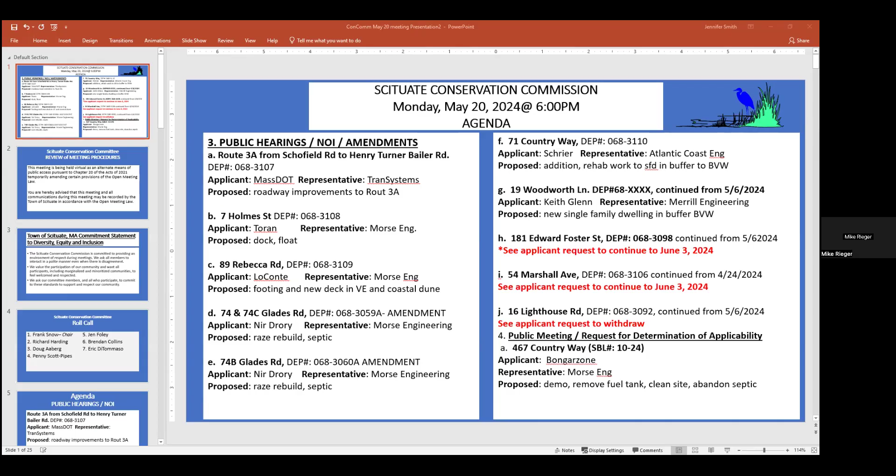Excuse me one second, Mike. Jen, do we have anything to put up on the screen for that one? Yes, sorry, I'm getting there. Hi, hello. I'm sorry, Mike, go ahead. There's a figure in the write-up. Yeah, this is good, Jen. Okay, so this is one sheet back, Jen, if you will, like sheet 11.

So this is the center of Route 3A where the Cohasset and Scituate town line is, right in the center of the screen. Everything to the south or east on this sheet will be in Scituate, going down toward Henry Turner Bailey Road.

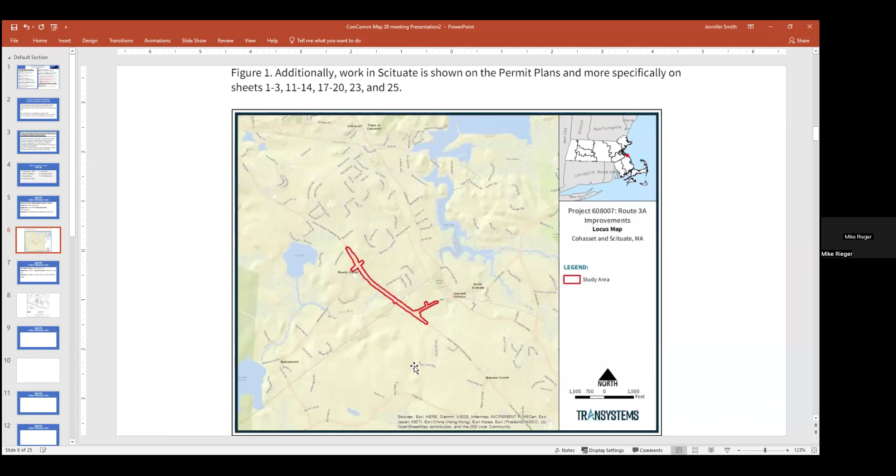I'm gonna switch back to this other screen just for a moment to show where all the work is on 3A. So the majority of the work is in Cohasset, but there is a small segment you can kind of see in the middle there. That dashed line is the town boundary. So about a third of it is in Scituate and two-thirds of the project is in Cohasset.

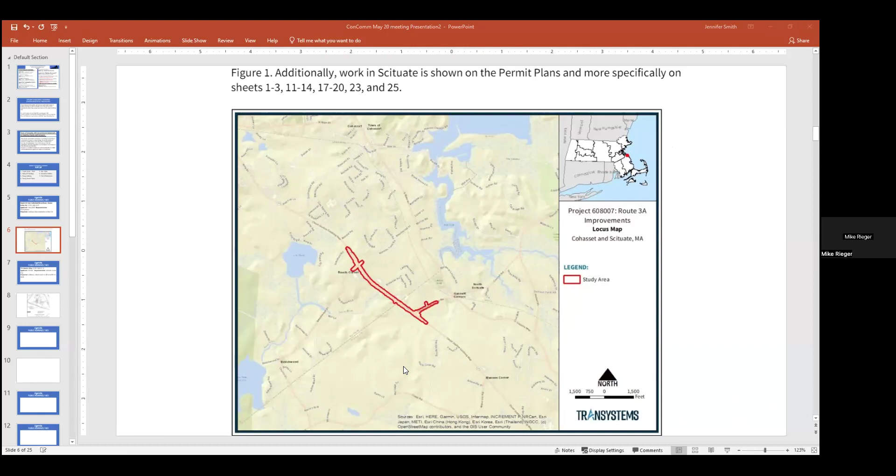Okay, back to the plan.

I wanted to touch on the anticipated construction timeline. It would be this fall 2024 to completion in summer of 2027, about 2.5 years of construction.

I also wanted to mention we had another site visit with Mass DEP last Thursday, 5/16/24, and we need to tweak some of the wetland flags. As shown here, you can see a wetland flag called H1 at the bottom of the screen. We went out with Mass DEP and refreshed the flags on Thursday, so there'll be subtle changes to the plans based on that.

And I guess next I'll talk about the wetland replication areas. Hold on, somebody's not muted? Greg, can you get him? Go ahead. Okay, yep, no problem.

So in Scituate there are two wetlands, wetland H and wetland I, we're calling them. If you go to the next sheet, sheet 12 - yes, right here. This is the impact to wetland H on the south side of the road.

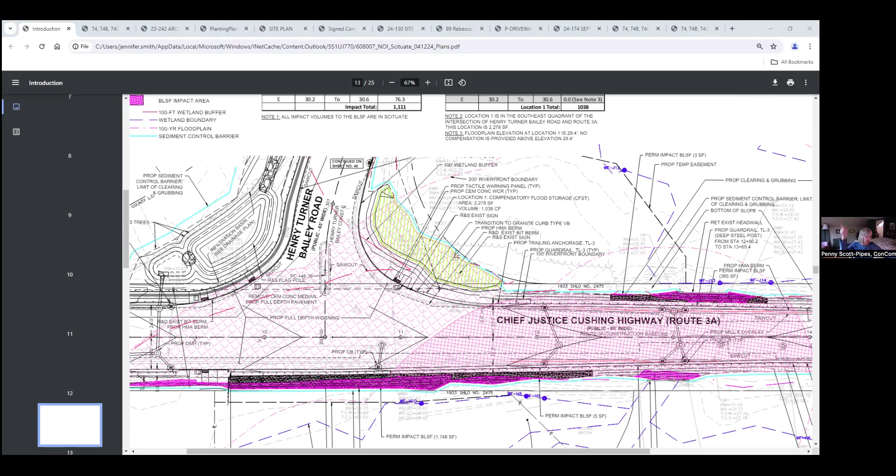We have so many accidents, but anyways. Penny, just to clarify, there'll be a signal at Henry Turner Bailey Road now as part of the project too, with a regular set of crosswalk lights instead of a flashing beacon. Booth Hill is the one that has the most accidents, but anyways, I'm done, Frank, thank you.

Okay, just don't forget our scope of review is conservation. Yes, I understand that. All right.

Richard? I don't really have any conservation questions about it. I would be interested to know, is the sidewalk going on both sides? It would make sense if it went on the southbound side—I'm saying that wrong, east, if you're headed south it would be on the eastbound side, yes, where it would turn into Henry Turner Bailey. I don't know the use of it on the other side, but that's beside the point, I'm just curious about it.

Yes, the sidewalk terminates right at station 9+50, it's on both sides of the road there, and then you'd have to cross Route 3A, go up Henry Turner Bailey Road, and cross where you can see those wheelchair ramps. So if there's going to be a signal, is there going to be a crosswalk? Yes, there'll be a crosswalk there. Okay, thank you, I'm done.

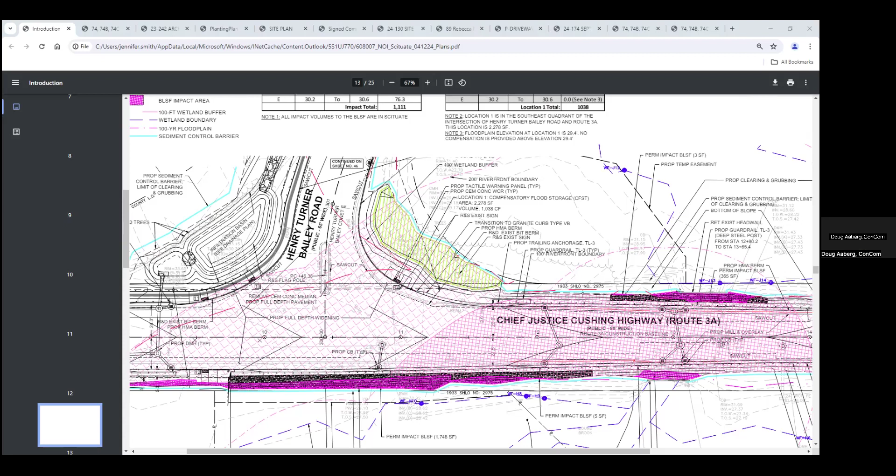Okay, sorry, that's not really a wetlands question, it's just a resident question. Sure, having easy access to the train stations is always a good idea. Okay, I'm good.

Thank you. Did Jen Foley join us? I do not see her. Okay, Brendan? Yeah, I don't think I have any additional questions.

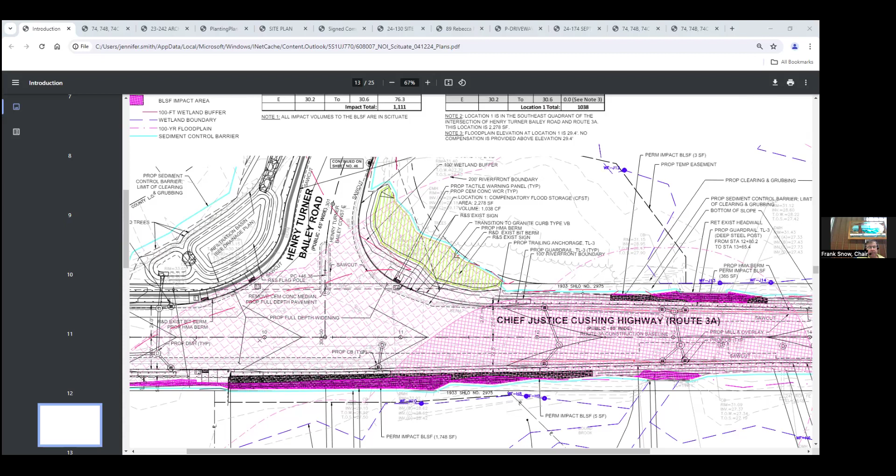My one question is on sheet 11, with regard to wetland H. You had mentioned constructing a wall. I see the scope of work line as well as the proposed sediment control barrier. The thing I'm having a hard time reading off the plan is where the existing guardrail is, and how much of an impact there will be extending Route 3A there, because there's obviously a steep grade change, and I'm wondering how that area of work was going to be staged, because we have the ledge cut there.

Obviously a very small piece of the marked wetland is going to be impacted there, but I was having a hard time discerning some of the lines. I see the gravity wall location, but building a wall, you're going to have to go probably a little bit farther, or am I misreading it? The extent the contractor can go is just to the temp easement line, which is that dark dashed line. And the erosion sediment control barrier is that cyan line you see.

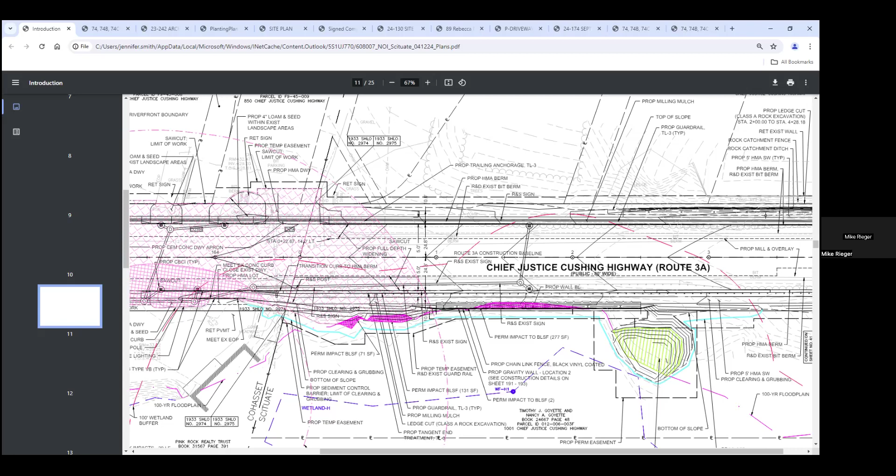If you go to the next sheet, Jen, sheet 12. These wetlands right here, wetland H and I, those are probably gonna look slightly different based on the wetland flags, like H11, that flag might slide up 5 feet or slide down 5 feet. It's more or less gonna be like the same wetland.

It just is gonna look slightly different. And then that permanent H impact area that says 52 square feet, that could potentially go down to 10 square feet, or maybe it goes up to 70 square feet. I don't have that information right now because we just got it on Thursday, but more or less this is the area that would change. Nothing else would change, I don't think. It would just be this vicinity and trying to replicate.

Do you know when you go before Cohasset? Thursday? Yeah, Thursday. And they have a lot more impacts. It's all actually north of Beechwood Street on Route 3A. Right. Yeah, there's a lot of wetlands in that area. Yeah, there's a lot.

It just, you seem concerned about the timeline and getting this out to bid.

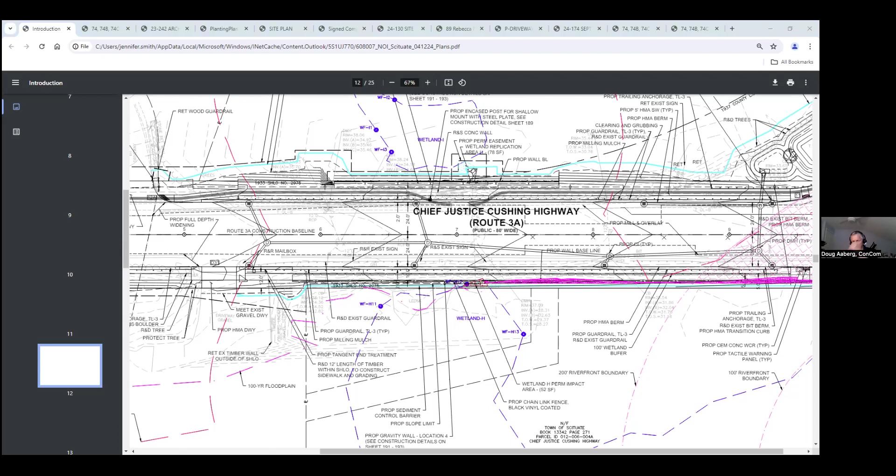I make a motion to continue to June 17th. That's from Penny. I'll second that. Who seconded? Brendan got it. All right, thank you, Brendan. All in favor: Richard, yes. Doug, yes. Eric, yes. And Frank, yes. Great, thank you.

Thank you. Thank you both. Have a good evening. Thank you.

Dock float, 7 Holmes Street. On May 20th, 2024, 6 p.m., the Scituate Conservation Commission will hold a wetlands hearing under Chapter 131, Section 40 of the Massachusetts General Laws and Section 30700 of the Town of Scituate Code of Bylaws, regarding the application of Richard and Ann Toran for work related to constructing a dock at location 7 Holmes Street, Scituate. Abutters and other interested parties are invited to attend. Information to access the virtual meeting is available on the website. And we have Greg Morse.

Good evening, Greg. For the record, Gregory Morse, registered engineer, Morse Engineering, representing the property owners, Richard and Ann Torian. The property is 7 Holmes Street, down in Humarock. As was just read into the record, the proposal here is a notice of intent associated with a dock at the property.

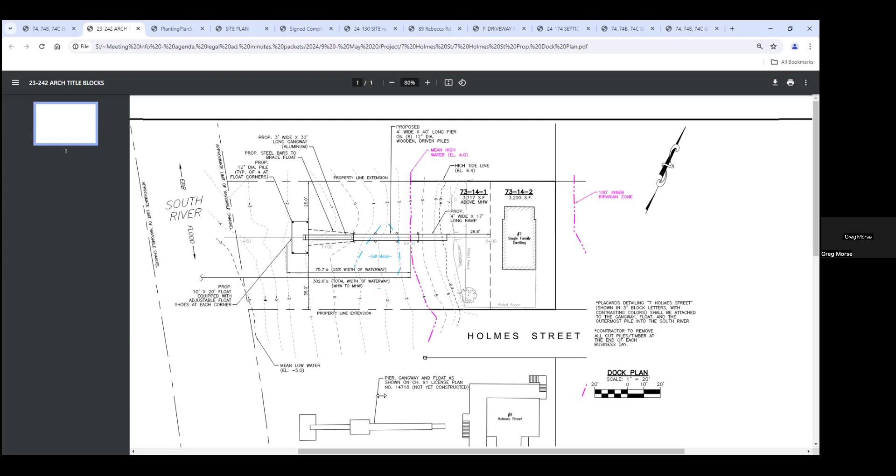You'll note on the plan, at the bottom, the property immediately to the south has a dock that was recently permitted there. The intent is that the contractor building that dock, which hasn't been built yet, would build both of these at the same time. Likely not this fall, but hopefully fall of 2025 would be the anticipated construction timeline for both projects at the same time.

This is our first stop. We still have to go to DEP Waterways and Army Corps of Engineers. But in reviewing this project, the items we've identified on the plan applicable under the wetlands regulations are the height of the dock over the mean high water.

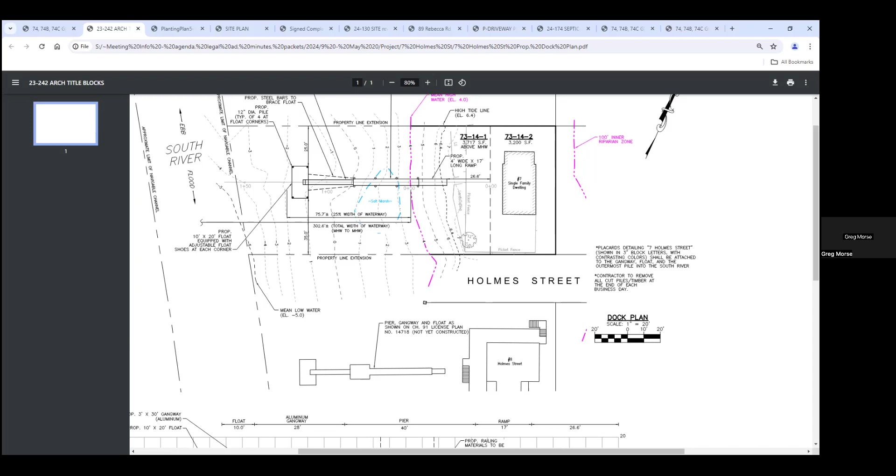If you scroll to the bottom of the plan, you'll see we've provided a profile of the dock, which identifies that the dock itself is 5 feet above the mean high water elevation. That's important because it allows access under the dock between mean low water and mean high water for pedestrian access along the river. The dock is largely over mud flats at this location, but there is a small portion that has salt marsh. Over that salt marsh portion, we've identified that the dock provides 6 feet of height from the bottom of the stringers over the salt marsh grass, to allow light to the salt marsh so it can continue to function.

DEP had no comments with this submittal. They did issue a DEP file number. I'm going to turn it over to you. Thank you, Greg.

Jen? Have we heard back from the harbor master on this? I don't think I saw his response, but maybe he sent something to you. We met with him preliminarily before we made this filing to show him the project and try to incorporate any comments he had. His comments when we met were to put the street number on the dock so it was identified on the float, and we made those adjustments. But since we've made the filing, I have not seen any formal comments from the harbor master.

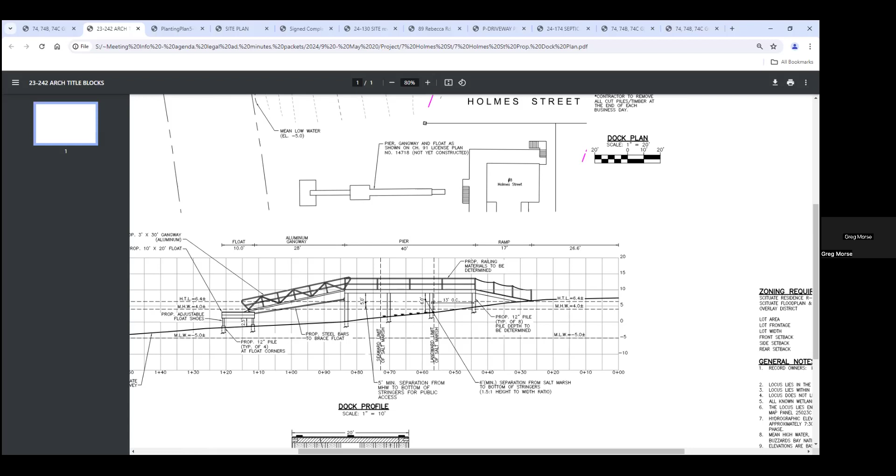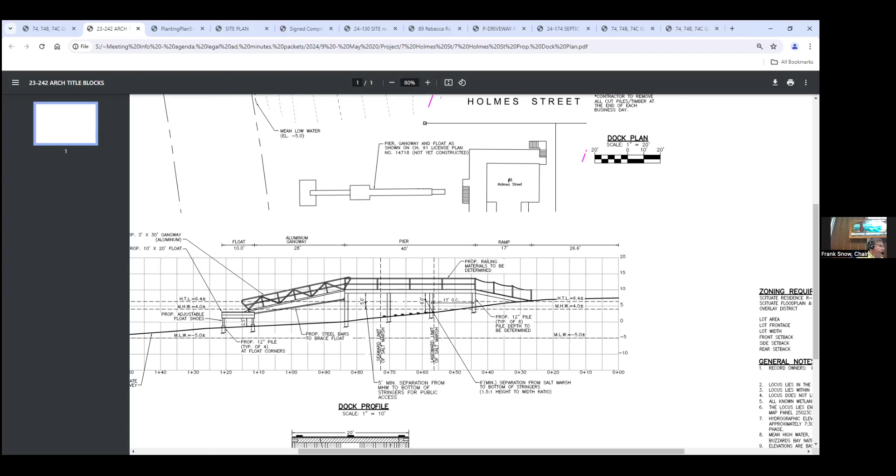Okay, he usually comments on where it is in the water also. We typically get a letter, don't we, or something, or an email? Yeah, so we can put that in the orders that we need to have something in writing from him.

Richard? Well, Greg, where the float is out, I'm trying to think how to phrase this question. It's frequently going to be in no water at low tide, I would believe. Am I correct about that? So yeah, this float is riding up and down on 4 pilings at the 4 corners, and they will have float stops on them so the float itself won't hit the bottom. I believe it provides a minimum of 2 feet from the bottom of the float to the bottom of the river. Okay, you caught why I was asking that question.

Second question, is that planned to stay in all year, or will it be removed at all in the winter? It could be conditioned to be removed. That would be fine, that works better.

And the last question for me would be on the ramp itself, how much space between the slats? I believe 3/4 of an inch is the requirement, but I actually thought it was more, I could be wrong. Looking at the plan here, just bear with me one minute. 3/4 is not very much. I thought it was more than that, but I could be wrong about that, that's the reason for the question. Sorry, one inch is the requirement. Okay, that makes one inch sense. Thank you. I'm good for now, Frank.

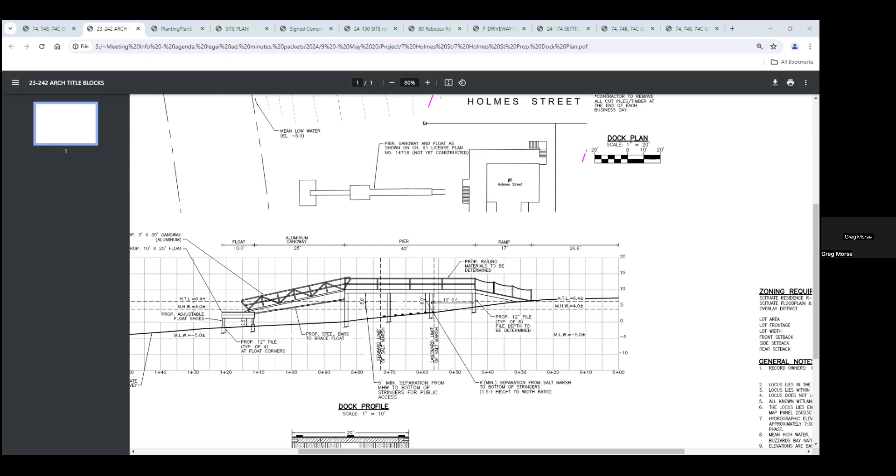This is 89 Rebecca Road, May 20th, 2024. The Scituate Conservation Commission will hold a wetlands hearing under Chapter 131, Section 40 of the Massachusetts General Laws and Section 30700 of the Town of Scituate Code of Bylaws regarding the application of John LeConte for work related to constructing a deck at a single-family dwelling located at 89 Rebecca Road. Abutters and other interested parties are invited to attend. Information to access the virtual meeting is available on the agenda.

Is this Greg again? Yes, good evening again, for the record, Gregory Morse, Morse Engineering, representing John LeConte. The property is at 89 Rebecca Road. This is a notice of intent to construct a deck on the eastern portion of the house.

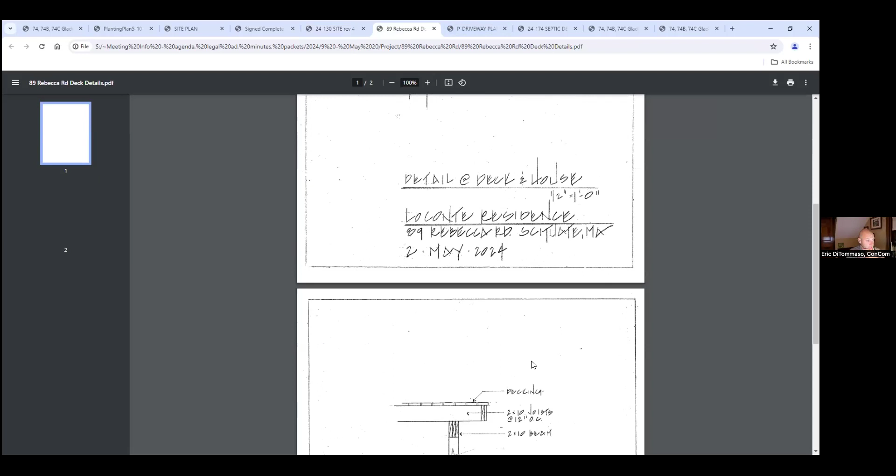Any thoughts on this? Not at the moment. Eric? No, I'm all set. Penny? Thank you. Jen? Yeah, I'm all set. Doug?

Well, my only question was exactly what we're looking at on the screen right now - so there's sonotubes, but there's a footing down below there too. You're supposed to limit the use of footings if you're in this location. With a sonotube, we basically have two options: either provide a footing under them, or increase the overall size of the sonotube itself, because you need that bearing capacity area on the bottom. So while you have a 2x2 concrete footing buried 4 feet below the ground in this case, it doesn't prohibit the earth above it from moving around the 12-inch diameter sonotube.

To eliminate the footing, you'd be looking at installing a 2-foot wide sonotube. It doesn't quite make sense. Typically in a location like this, you'd be looking at doing some sort of driven pile if this was a new house foundation, for example. But for a deck, the loads are relatively small. And in this case in particular, access to the back of the property is prohibitive of getting equipment back there to drive piles. So this would all pretty much be done by hand with materials brought in.

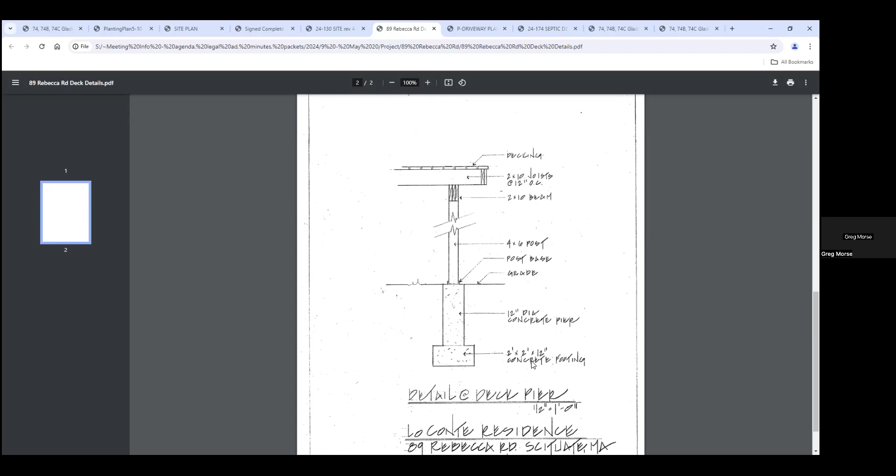Okay, all right, yeah, that was my exact question. I didn't know how that actually worked with those footings, but that makes sense - a 2-foot sonotube is going to be more destructive than this. Yeah, that makes sense. Okay, thanks, Greg.

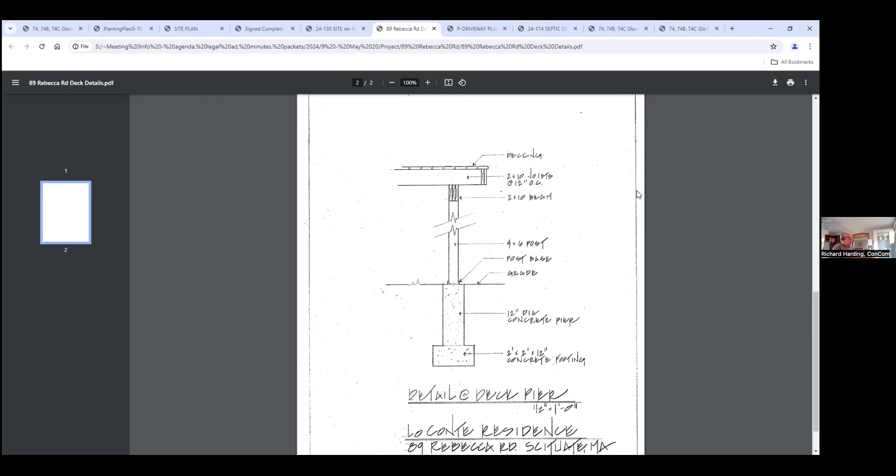Richard? The only question I have is on the original plan we saw - it's not up right now - I only counted 8 sonotubes. I think you said there were 10. Am I making sure that that's right? There's the two right there that should be shown on this plan that don't really stand out, and they're at the corner of the stairs. But the stairs are being removed? One set - so there's proposed stairs from the deck down to the ground. And what you don't see is there's supposed to be a sonotube at the corner of the stair and at that interior corner of the deck. Okay, there should be 2 more there. Thank you, probably should be corrected, but it's no big deal.

Okay, mine - so I hit on everybody, right? Yeah. Anybody in the audience for this one? I don't see any.

Greg, when I look at that plan that shows the sonotubes, it doesn't really show a depth. I'm not seeing that. So what is the depth of the bottom of the footing? Bottom of the footing is 4 feet below grade. And that - I'm just thinking out loud - but does that comply with any kind of scour issue or anything there? We believe it does.

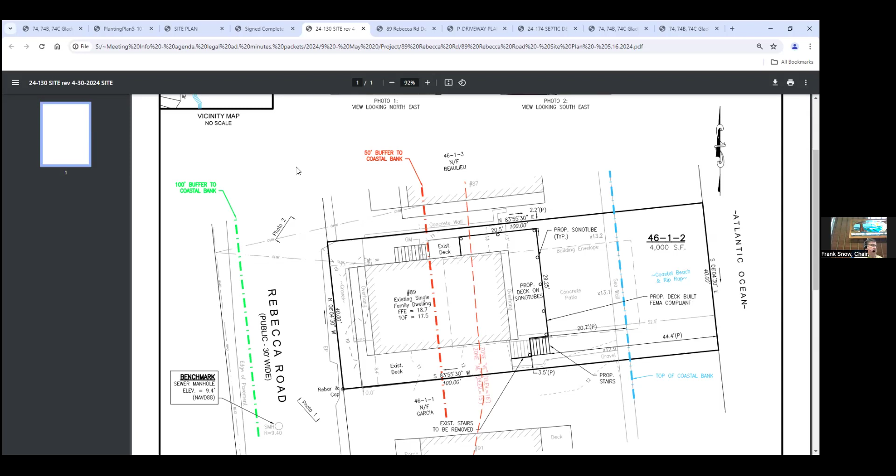No roof. Okay. I'll make a motion to close. Do I have a second? Second it. I'll second, Richard. All in favor: Doug, yes. Brendan, yes. Eric, yes. And Frank, yes.

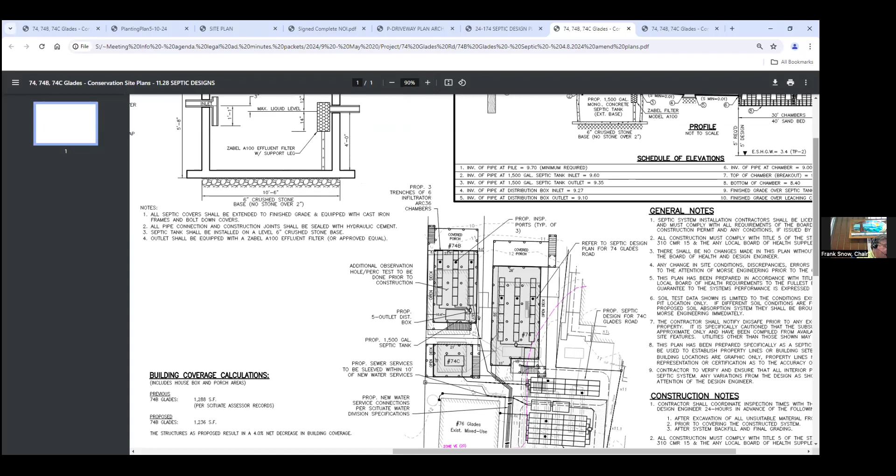Now, on our May 20th conservation meeting, the Scituate Commission will hold a wetlands hearing under Chapter 131, Section 40 of the Massachusetts General Laws and Section 30700 of the Town of Scituate Code of Bylaws, to amend an order of conditions issued under DEP file number 68-3059, regarding the application of Nura Drury for work related to raising and reconstructing, as well as septic repair, of a single-family dwelling at location 74 and 74C Glades Road, Scituate. Abutters and other interested parties are invited to attend. Information to access the meeting will be available on the agenda on the website.

Do you want to read both of them? Oh yeah, let's do that.

On May 20th, 6 p.m., the Scituate Conservation Commission will hold a wetlands hearing under Chapter 131, Section 40 of the Massachusetts General Laws and Section 30700 Town of Scituate Code of Bylaws, to amend the order of conditions issued under file 68-3059, regarding the application of Ned Drury for work related to raising and reconstructing, as well as septic repair, of a single-family dwelling at location 74B Glades Road. Abutters and other interested parties are invited to attend.

Okay. Jen and I spent some time with Greg trying to sort this out, feel somewhat comfortable, but you guys can see if you can figure it out.

For the record, Gregory Morse representing Ned Drury, the owner and applicant of these properties, 74, 74B, and 74C Glades Road, which were destroyed by fire last year in Minot. We came before the commission and the zoning board of appeals to rebuild these homes. They were approved by the zoning board and by the conservation commission for raise and rebuilds, and they also had septic systems approved. The commission issued an order of conditions to rebuild the septic systems for these three buildings.

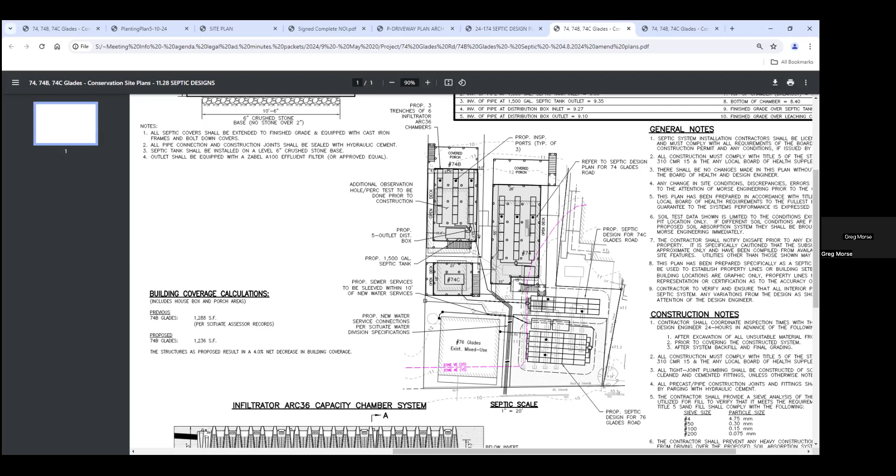But that space that's available is only available if we reconfigure the septic systems already approved for numbers 74, 74B, and 74C. So what we did is we took house number 74, which had a septic system underneath it that extended beyond the covered porch, and looking at where the cursor is, here. Maybe this one. Yeah.

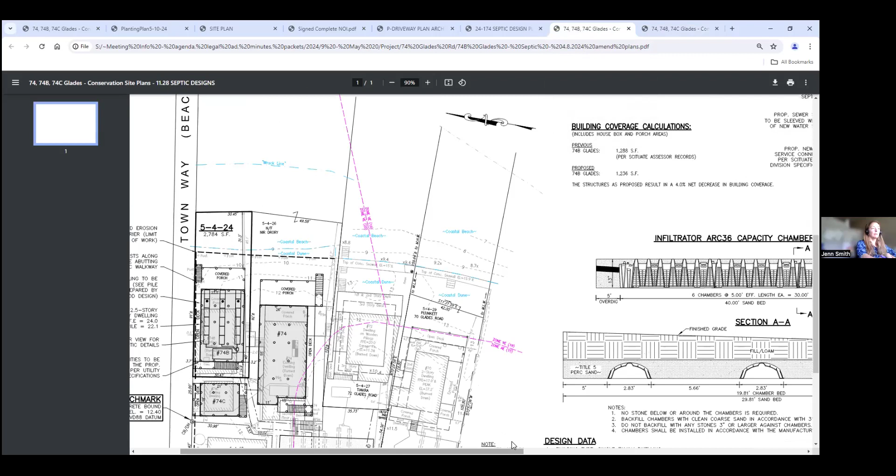The view you were on previously was pretty good, actually, Jen. Okay, yeah, go back to that view. So house number 74 had a septic system approved that was under the house and went out beyond the limit of the house to underneath the covered porch. What we've done is we've pulled back that septic system and reduced its size.

That septic system was supposed to take flow from 74 and 74C. We've now reduced that septic system under number 74. 74C will get its own septic system, located out front along Glades Road under the gravel driveway area. That way there won't be a shared system between 74 and 74C.

74B, which is the house at the top left, used to have its septic system in the parking lot out front on the 74 property. But what we've done is relocated the 74B septic system so it's entirely on its own property, underneath the house. This is what opens up the area for number 76 to come in, probably later this month or early next month, to fix its septic system.

So you're not approving anything to do with number 76 tonight, but I'm telling you the reason we're reconfiguring these septics is so that 76 can get a compliant septic system in the near future. What's there today is a non-compliant system.

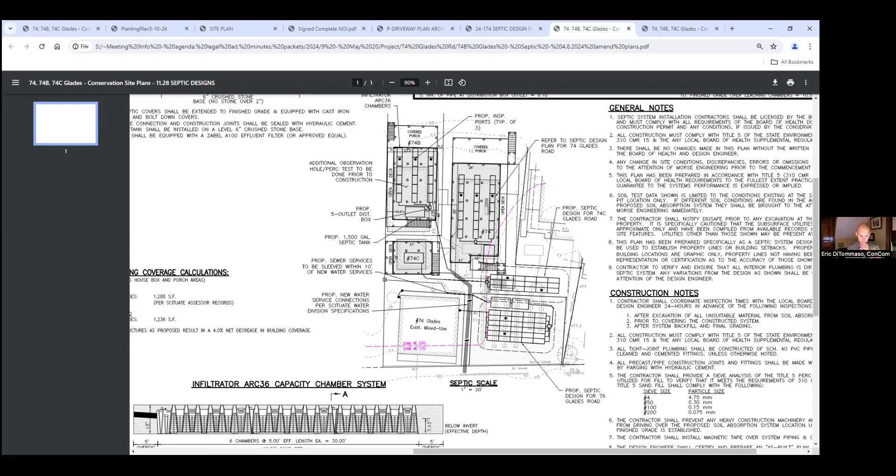On May 20th, 6 p.m., the Scituate Conservation Commission will hold a wetlands hearing under Chapter 131, Section 40, Massachusetts General Laws, and Section 30700 Town of Scituate Code of Bylaws regarding the application of Ryan and Charles Schreier for work related to an addition and rehab of a single-family dwelling at location 71 Country Way, Scituate. Abutters and other interested parties are invited to attend. Information to access the virtual meeting is available on the agenda posted on the website.

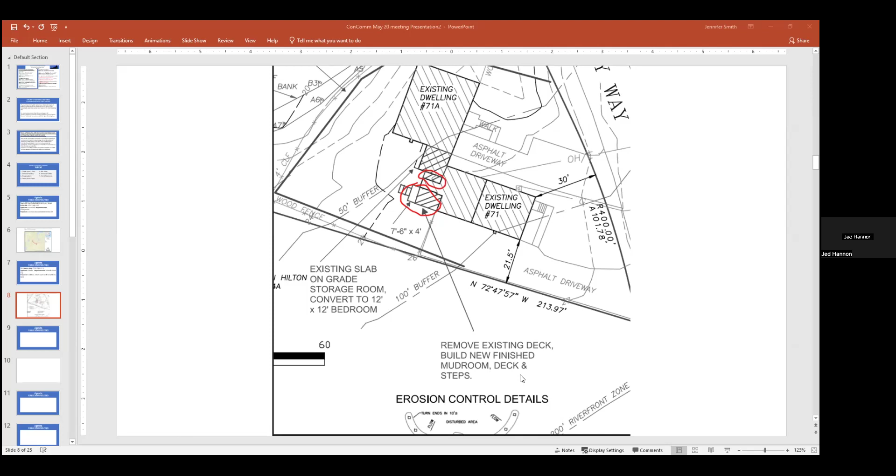Almost following that 25-foot contour line, Frank? Yeah, that's what - yep, and then maybe swing it back up towards the street a little bit. If I were paying for it, that's what I'd want to do. Plus it just keeps the work all to that area, so people don't venture off, unless something else was planned, like lawn for the yard. But if that's not the case, I'd just do that. Absolutely. Okay, all right.

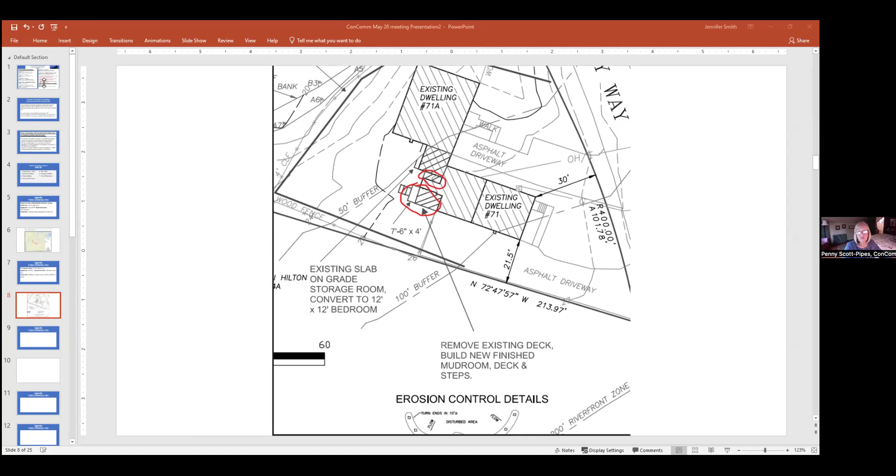19 Woodworth, where do we stand on that one? We continued it and I can't remember why. I think we wanted some more details on the planting plan. So we have a few people here, hold on, I'm trying to find them. All right, Brian, I can unmute you, and then we have Art Allen, who reviewed it for us also, great, here.

And all right, so Brian, do you want to let us know what was new? My understanding is it's the planting plan, the details on that, or what changed. Yeah, so Brendan Sullivan's here too from Merrill, and he can give you the nitty gritty. But I believe the only two changes were the planting plan, and then the amount of impervious driveway was reduced a little bit. I think that was the only two comments the board had last time.

So we did submit DEP two weeks ago today. Haven't gotten a number yet. I think what we are hoping for, if it pleases the board, is a close and a positive vote tonight, and then Jen could fill in the DEP number on the order of conditions. But if not, whatever the board thinks. I think Brendan Sullivan can give you the details on the changes we made.

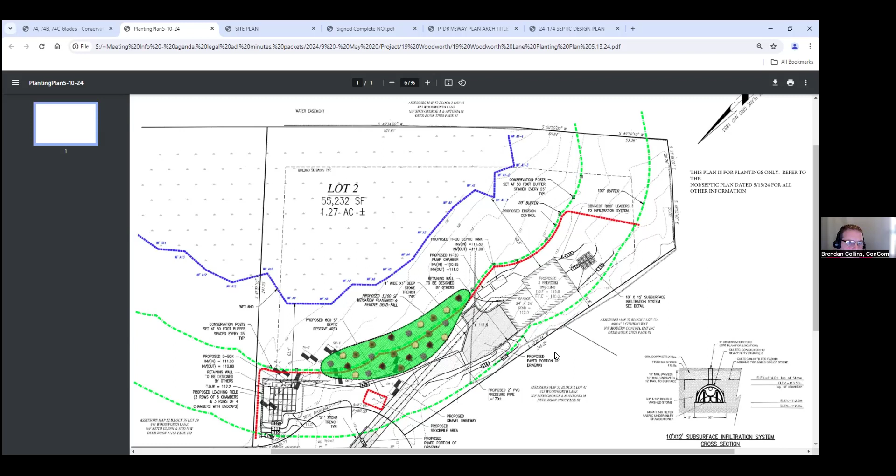So we got a motion from Richard and a second from Brendan. So all in favor: Doug, yes. Penny, yes. Eric, yes. And Frank, yes. Great, thank you, take care. Thank you, thank you, thanks Art. Thanks Brendan. No problem.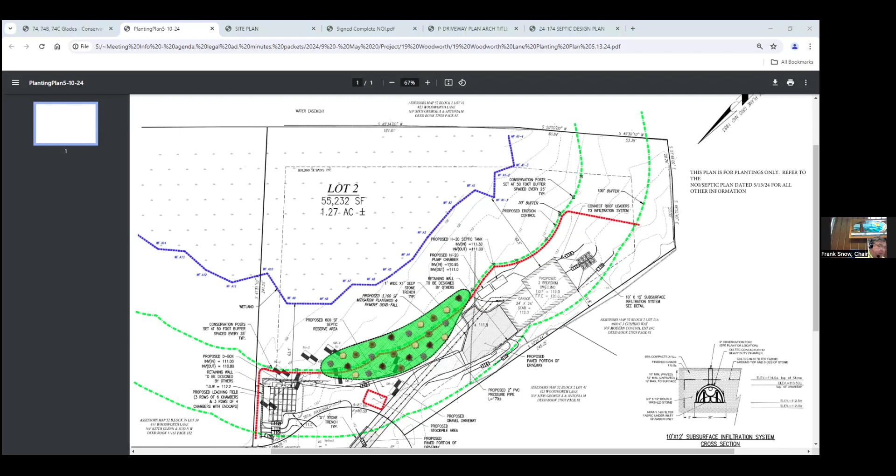Now we're on to Edward Foster. We have a request to continue 181 Edward Foster to June 3rd. Can we do that, Jen? Yes. Well, they asked a while ago, so that should be okay.

I make a motion we continue 181 Edward Foster to June 3rd. Second. All in favor: Richard, yes. Doug, yes. Brendan, yes. Frank, yes.

Now 54 Marshall Ave. We also have a request to continue this to June 3rd. Is that going to work? That's what they requested. Let me see if I already have it on here. I think June 3rd will work.

What is Marshall Ave anyways? It's down Sand Hills. I know where Marshall Ave is, Shore Acres, near Egypt Beach. What's the project? They're rebuilding their house, a single family home there, but their stormwater's being reviewed, so we were waiting on that.

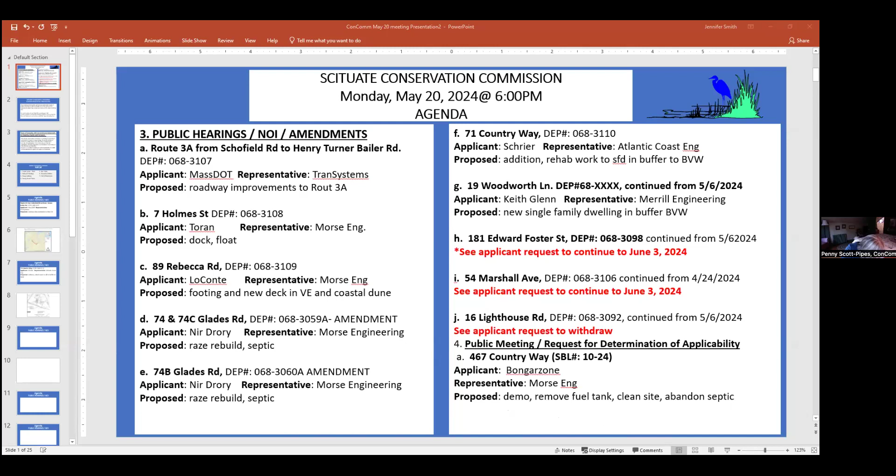Okay, so now we have an RDA at 467 Country Way. On May 20th at the 6 PM meeting, the Scituate Conservation Commission will act on the request of Kenton Bongarzone for a determination of applicability of the Massachusetts Wetlands Protection Act and the Scituate Wetlands bylaws for activity related to demolition of an existing building, disconnecting utilities, abandoning the septic system, and removing the fuel tank, as well as cleaning up and stabilizing the site at 467 Country Way, Scituate. Abutters and other interested parties are invited to attend, and information to access the meeting will be available on the agenda.

For anybody that doesn't know what this is, it's the old Egypt garage, by the corner of Captain Pierce Road and Country Way. We have Greg Morse to present on this. Okay, Greg, you're back.

For the record, Gregory Morse, registered engineer, Morse Engineering, representing the property owner Kenton Bongarzone. This is an RDA for their property at 467 Country Way, which is the Egypt Garage. The property itself is approximately 36,000 square feet in size, developed with the garage, which is right up on Country Way. There's a gravel access driveway around the backside of the garage.

Along the property line on the right-hand side, or as you're looking at the screen here on the left-hand side, and along the back, highlighted in blue, is a bordering vegetated wetland that was delineated by Brad Holmes on April 23rd of this year. Interior of that BVW, there is an intermittent stream, which we delineated as the IB series - that's the purple dash line you see interior of the wetland.

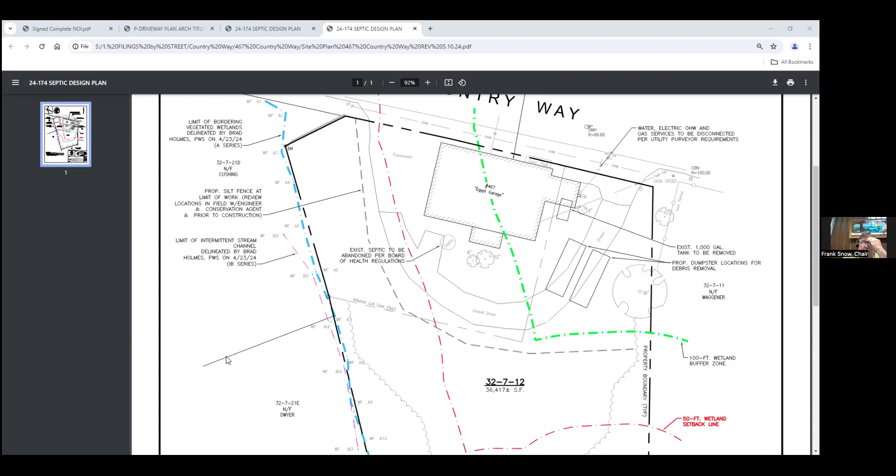Okay, well plus there's a paved area that pretty much encircles this thing, some driveway or whatever. Yep. But is the building higher than Country Way? I'd almost wonder if we weren't inviting runoff onto Country Way, if it might need a silt sock wrapped between the building and the street, once you take that down. It's extremely flat between the building and Country Way. But if we have heavy rain, do you think we're worried about gravel or anything running onto Country Way? Should that be addressed, since it's right on the street essentially? Just wondering if that needs something.

I can look at that, and if we need to add something, we certainly will. I see runoff from Country Way probably flowing onto this site as opposed to this site flowing onto Country Way. I'm trying to remember which is higher there, and it's just not registering. So I'd say if Country Way is higher and the water runs onto there, that's fine. But if it's the other way around, it almost seems like there ought to be a silt sock, maybe 8 or 10 feet longer than the building on either side, wrapping back around. Okay, would make sense to me.

People are going to drive in there and whatnot, so you've got to kind of protect the area they can work in with the silt fence, and then if there's a concern about runoff towards Country Way, that ought to get addressed. Okay. Yeah, we could certainly add a silt fence or sock along Country Way if necessary. The note I have on the plan, on the left-hand side, calls for it to be reviewed in the field between the conservation agent and the engineers, so there's wiggle room. I realize there'll probably be some adjustments to that erosion control barrier. Yep, we can add some if we deem it necessary. Good, okay.

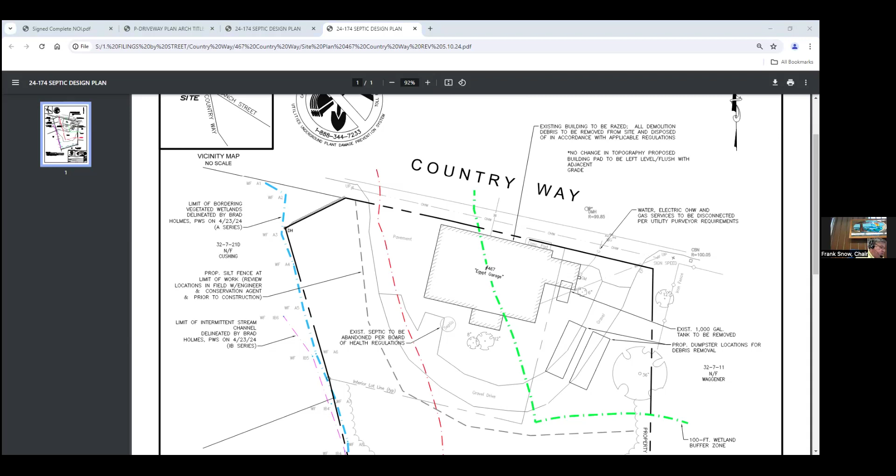We have a request for an extension of 53 Border Street. I make a motion we give them a 2-year extension, Jen, is that the norm? Yes. Okay, that's a motion from Penny, I'll second that, from Brendan. All in favor: Richard, yes. Doug, yes. Eric, yes. And Frank, yes. Jen, is that one we'd probably be taking a look at, you and I, or a couple of members, fairly soon? Yes. Okay, I think that's one we want to see where things stand. Have we got any kind of as-built on that one? Yes, he dropped one off this week. It's an as-built from the fall, but yes, we have a status as of then.

Okay, thank you. And then request for amendment for 347 Central. What's that? Hey, what are we talking about there? Somewhere I have this, I think they're adding a driveway to the plan. Greg, is this...?

Let me look for the plan, but if I remember correctly, what they wanted to do was add a gravel driveway in front of the house. They didn't have that on their original plan.

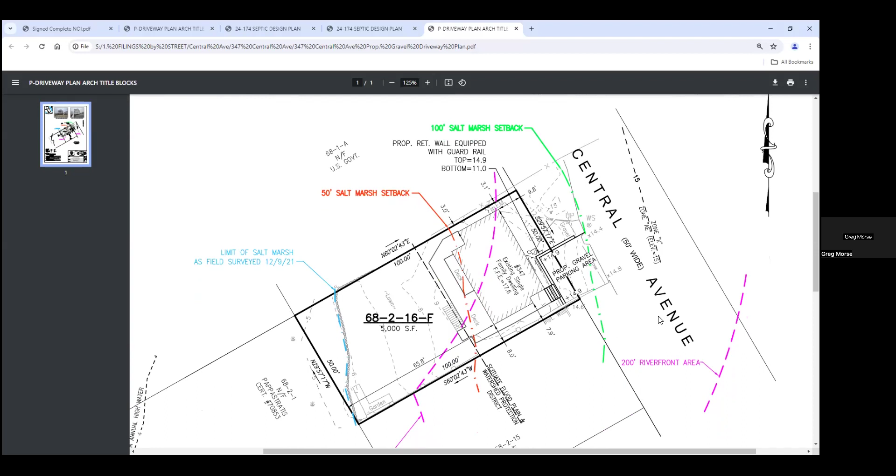We thought it would qualify as an amendment. Greg, excuse me for one second - we have two houses recently, I can't remember which one it is. Is this the one right next to the Air Force Base or the one a little further south? Right next to the Air Force Base. Okay, I'm good with it then.

Well, if the mayor of Humarock is good with it, do we need to vote that? So they requested an amendment - are we good, do we want this as an amendment, or do we want to accept it as a minor modification? You're right, you would be saying yes, we want to hear it as an amendment, and then we would advertise it for a future meeting.

Could it be a modification? Greg, are you still on? Yes, I am. So that's not depicted in this drawing, right? What we're looking at right now is what we approved originally. No - this is what they're proposing. Oh, I see. Does that include a retaining wall? It does have a small retaining wall.

Okay, yep, I think we need to consider that for an amendment. So if we could get that on - yep, all right. So then, yes, as far as getting everybody to okay hearing it as an amendment. Do you need a motion for that or is it just going to be agreed to? This will be put together and then we'll vote on it. Okay, sounds good.

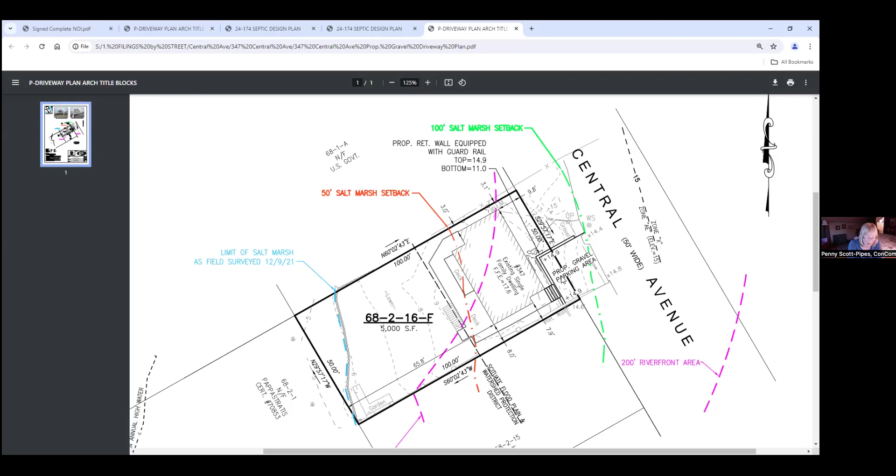Yeah, but that's wonderful, Frank. So happy you found them a spot - well, let's hope it works because they deserve it. And I can't think of anything else for this evening.

Well, one other thing, open space I guess - the IXL group wanted to, again this summer, do some work on Driftway Park, a couple hours a week. Oh yeah, but for sure, that'd be great.

I'm actually going to try to get to Driftway Park with Mr. Scott and see if we can come up with some fixing up there as well. That group's always been super helpful. They have, and we haven't heard from them in a while.

That's great, Jen, if you could get back to them, we really appreciate it. Yes, and we have, I guess I would say we'll probably start with putting enforcements back on the agenda and adding those in.

So we can keep those up, once you get your helper, Jen. We appreciate that Jen is hobbling around here still on her crutches and keeping us moving, which is very admirable. We appreciate it. Above and beyond.

If we finish long before 8 o'clock, I won't eat all the candy sitting here. Did Nancy bring a pile in for you? I don't know where it comes from, but there's a pile here from Nancy. I've done a job on it, but there's still a few left.